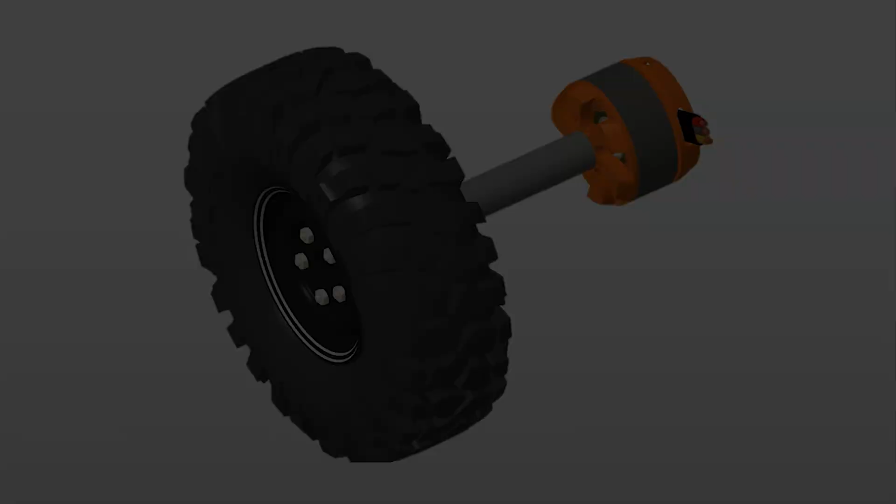Portal axles on their own don't automatically reduce torque twists. It's the gear reduction inside that often comes along with portals that reduces the twist, not the axle itself. Let's do a quick review and then I'll follow up with a demonstration. Let's start as simply as possible and build from there.

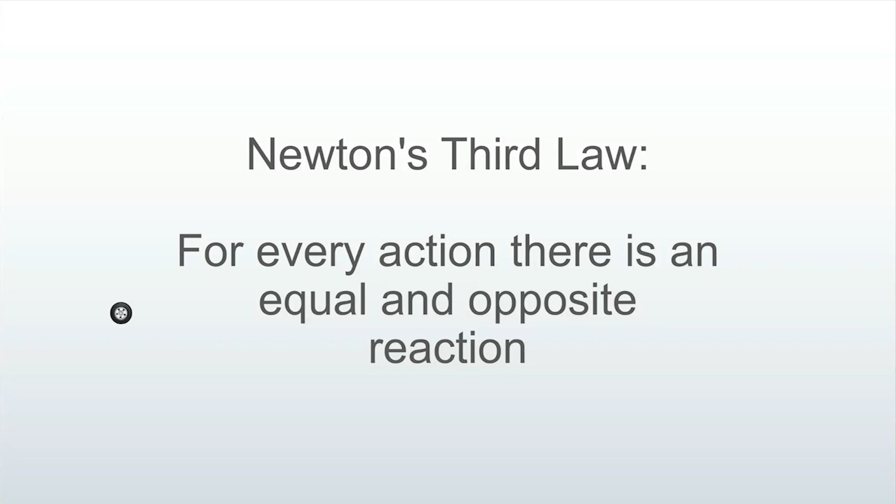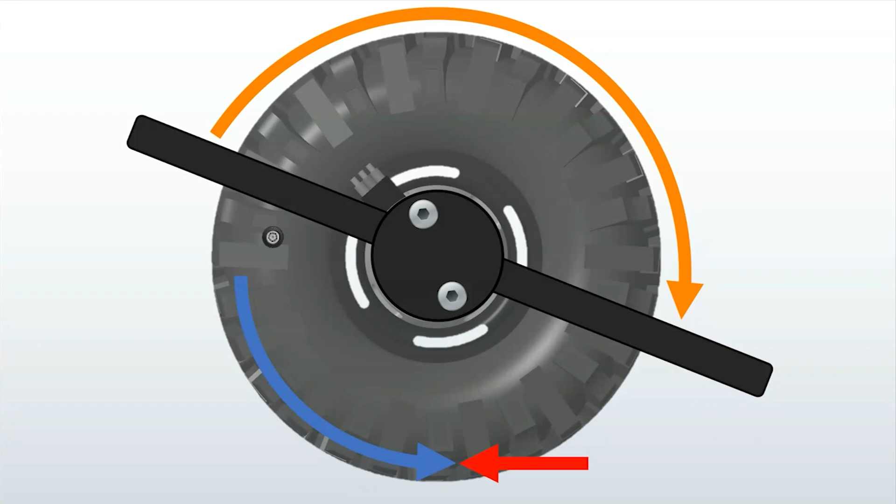Picture your motor directly attached to the tire. Remember Newton's third law. For every action, there is an equal and opposite reaction. When the wheels meet resistance to rotation, the motor wants to rotate in the opposite direction. Since your motor is attached to the skid and chassis, the motor housing twists the chassis, which is called torque twist. Let's keep it simple and switch to a top view.

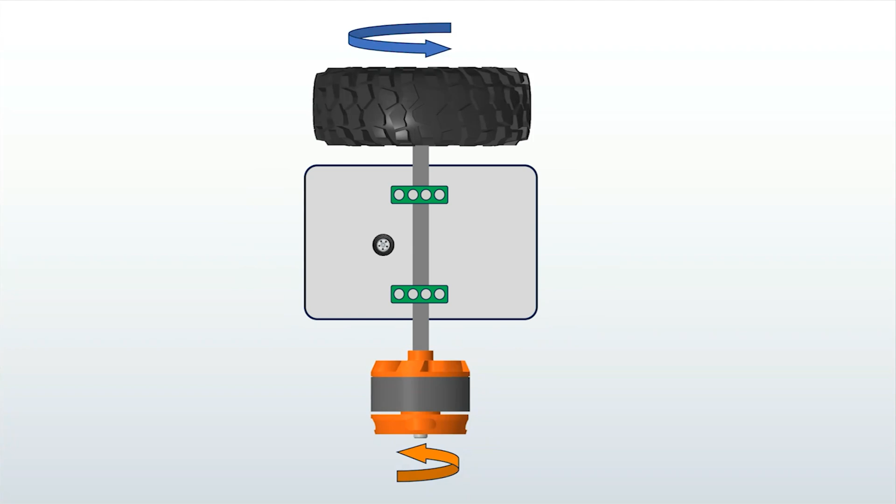Imagine adding a floating box or housing around this drive shaft. Nothing is attached to the box, it's just floating in space. The axle is spinning through the box on bearings. In one side, out the other. There's still a rigid shaft connection between the motor and the tire, and this box is simply floating on bearings.

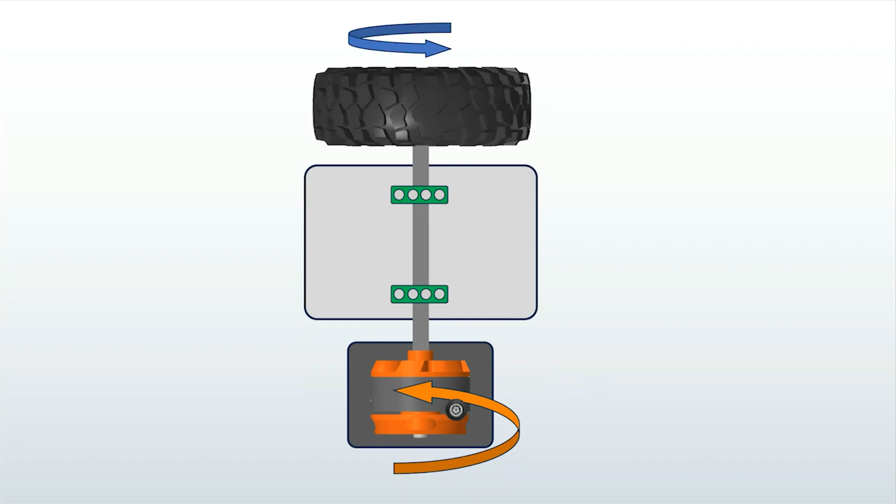Is there any force or twist acting on the gray box? No, just a very small amount of bearing friction. The plate the motor is attached to wants to resist the force of the wheel, but not the gray box. It's just along for the ride.

Now let's add some gear reduction to this floating box. There is still no force trying to influence or rotate the box. The skid wants to react to the tire contact patch. That's it. Nothing has changed. Does this start to look familiar? It's basically a straight axle setup without the bevel gear.

Now let's add some more gear reduction. There's still no force trying to influence the box. This is a portal axle without the bevel gears.

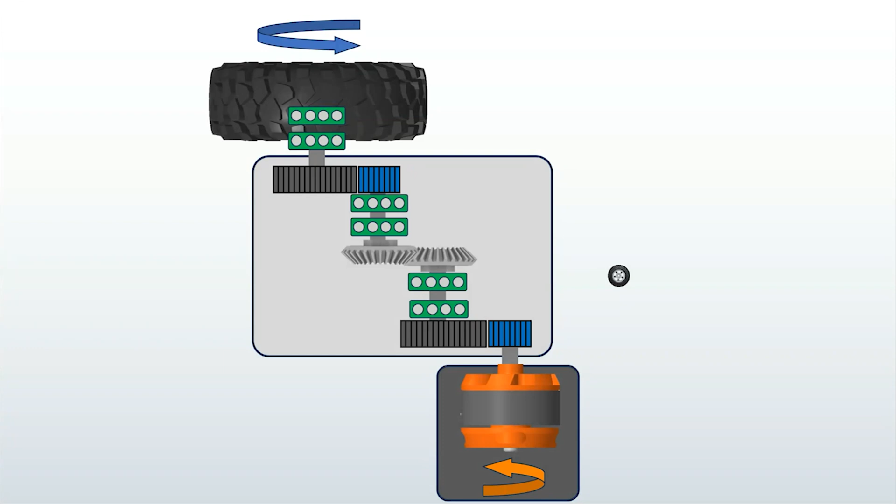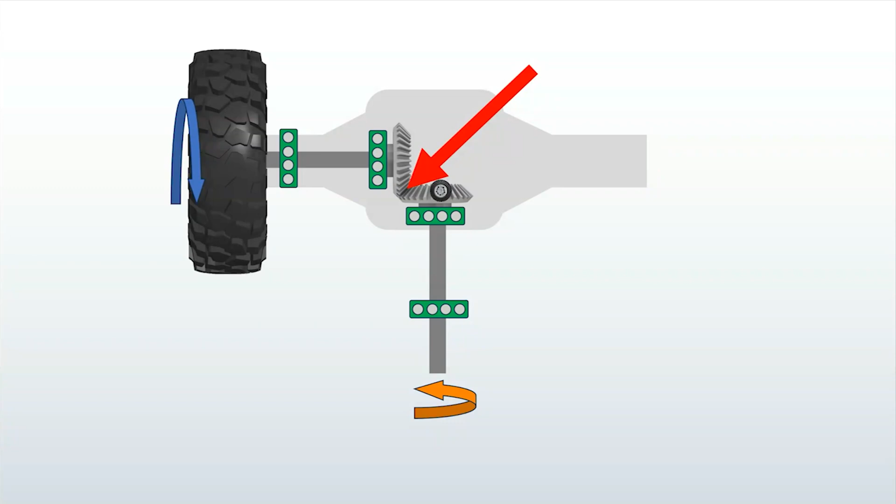Everybody good so far? Now let's replace the floating box with an axle housing and change two of the gears to bevel gears. You still have no reaction at the axle, it's just floating. The torque comes in one end and out the other. The input drive shaft is acting against the other bevel gear, not the housing.

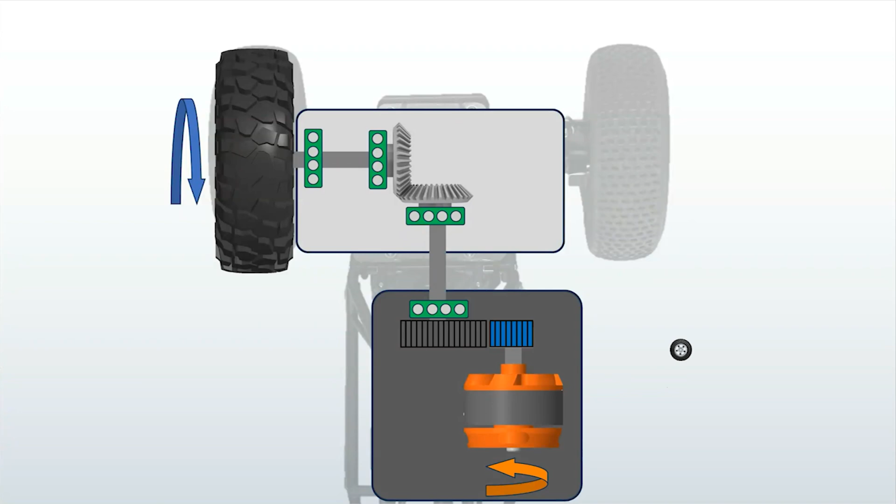Here is what a more complete straight axle vehicle would look like, with a transmission added by the motor. Remember this box from before? Your chassis and skid is the dark gray box. Nothing has changed from the prior examples. The motor force is reacted at the tire. There's no force or twist acting on the axle housing.

Now let's add some portal gears. Here it is again with the boxes. There's still no twist on the axle box. The drive torque just passes through. It doesn't matter where your gear reduction is, only the total gear reduction from motor to tire matters.

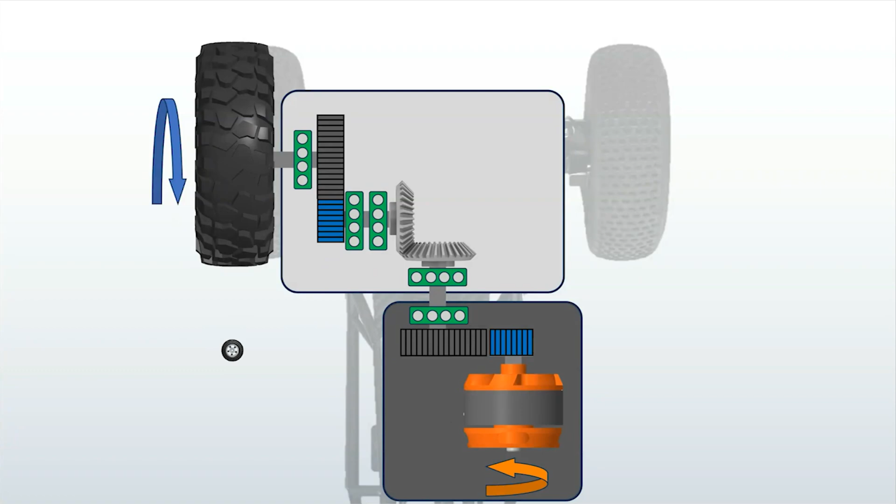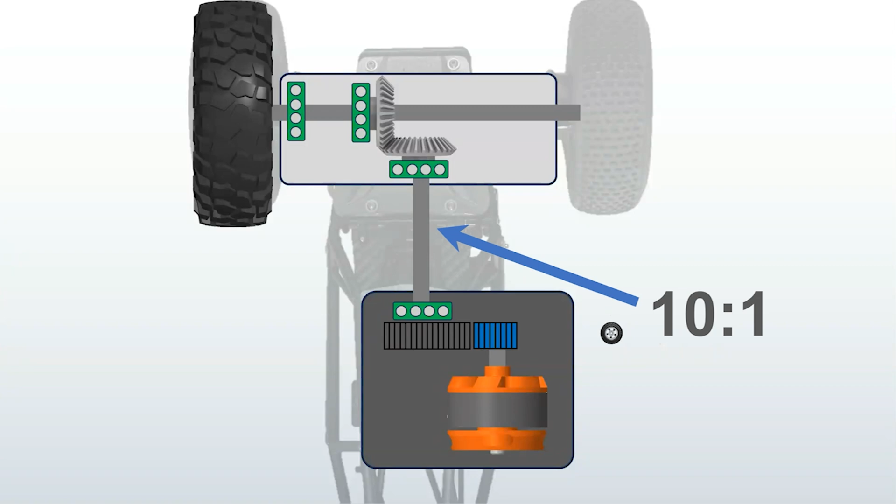Now let's address a common misunderstanding. Let's say you have a 10-to-1 output from your transmission. Your drive shaft is seeing a 10-to-1 torque between the transmission output and the axle. Now let's move some of the gearing from the transmission to the axle. This is what happens when you add a portal axle. The total gear reduction is still 10-to-1 because you multiply the two ratios.

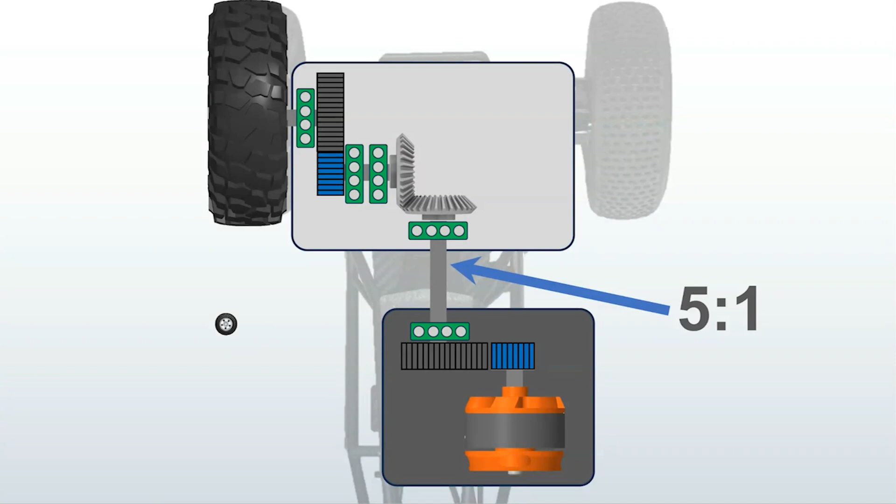The misunderstanding is that since you've moved some of the gear reduction from the transmission to the axle, there is less torque on the drive shaft, which reduces twist. The drive shaft is now seeing 5-to-1, which is good. It reduces strain on your drive shafts and transmission, but it doesn't change twist. It doesn't matter if the drive shaft torque is 5-to-1 or 10-to-1. The twist reaction doesn't happen until you get to the tire.

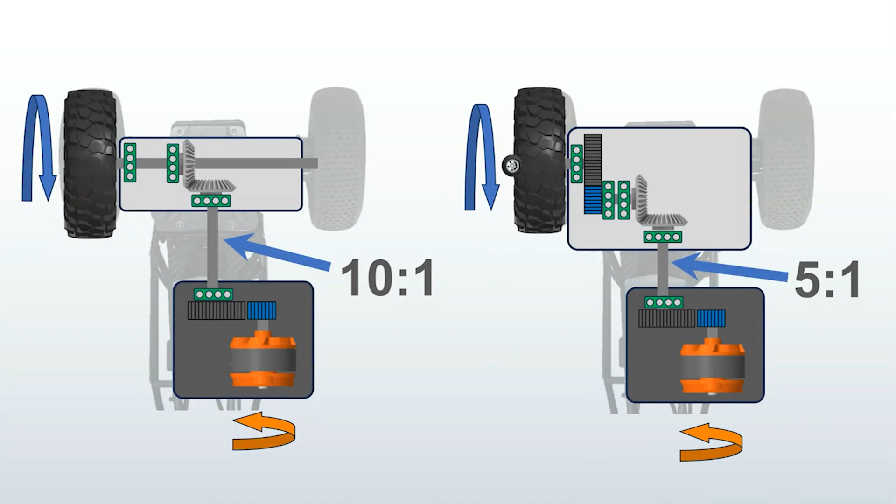You can't just pick one small portion of the drivetrain and isolate it. You have to look at the complete system. The action is the motor, the reaction is the tire. It doesn't matter where the gear reduction occurs in between those 2 points. Of course, there is torque in this drive shaft, and there is visible twist between the skid and the axle, but that twisting reaction is not coming from forces between the axle and the skid. The drive shaft simply cannot impart any forces on the axle.

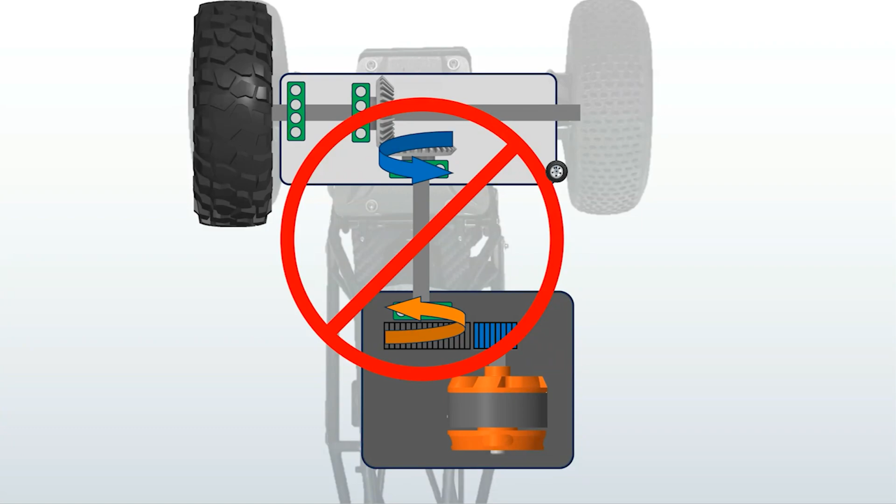All you can do is spin the bearings inside the axle. One of the misconceptions people have is that moving some of the gear reduction away from the transmission and putting it on the axle reduces twist. This is not correct logic, and the math does not support this.

Let's see a demonstration. I've got the rear axle completely detached. There's no shocks or links or anything holding it. It's just floating in space. I'm going to hold it with my hand. And then what I'm going to demonstrate is whether or not this drive shaft puts any twist onto the axle. A lot of people believe that's the case, and I said that because your differential runs on bearings, the force coming from the drive shaft simply passes right through without any effect on the axle. And we're going to see if that's accurate or not right now.

So let me test the throttle. Okay. So, yeah, there's no twist whatsoever being transmitted to my axle. It's passing right through. Yeah, I don't even feel bearing friction.

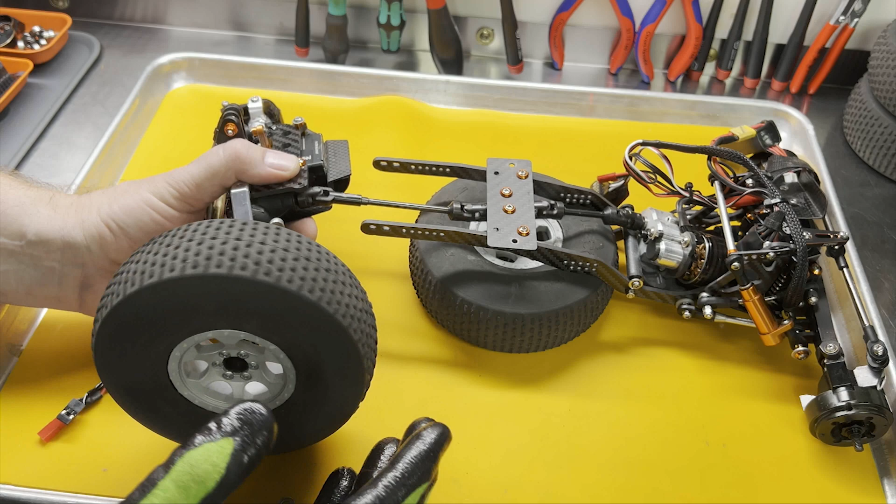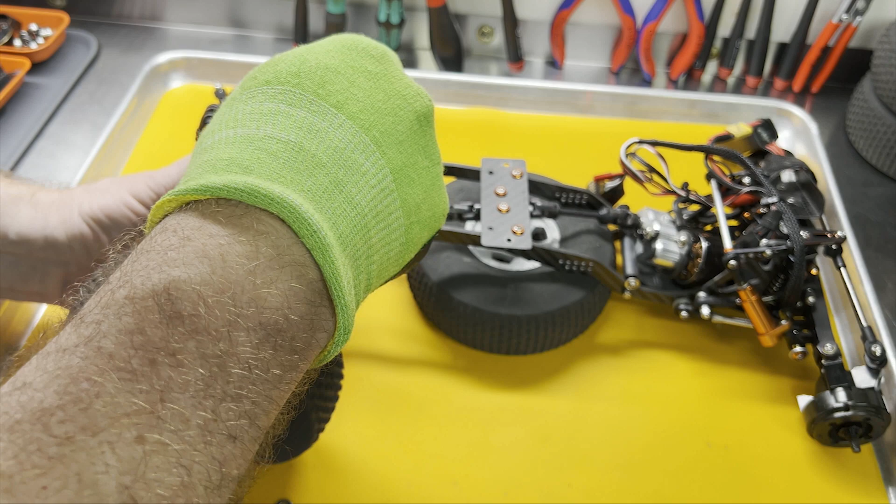All right, now we're going to test it where I can put a little bit of resistance on the tire. So let's get it going. Run it at medium speed. All right, as I add resistance to the tire, it wants to twist the skid, and it also wants to lift up the front of the rear axle. So the rear axle is rotating this way, counter to the braking force on the wheel, but I'm not feeling any rotation in the axle at all.

Got it. Did you see that skid lift? That's from the drive shaft being resisted at the wheel. Go ahead and try it one more time, real slow. Stop. All right, one more time. Now, I'm not feeling any twist at the axle. I'm only feeling the rotational resistance of the axle, which makes sense.

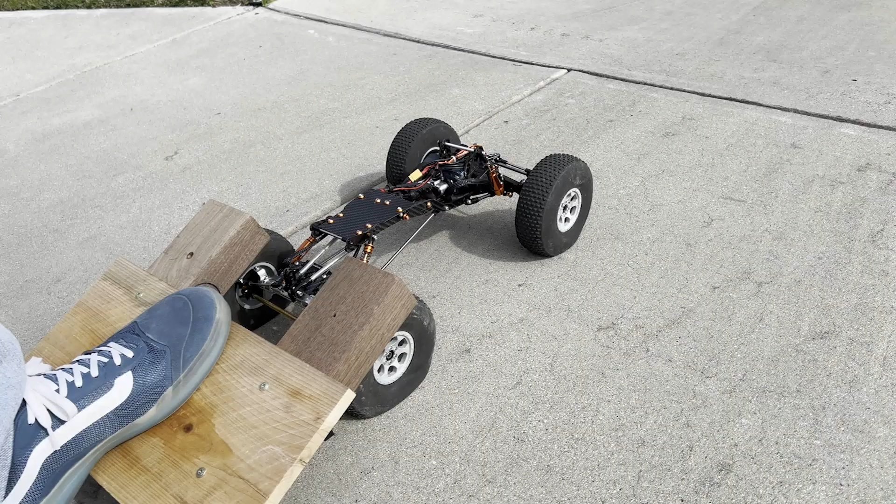My primary rig has portals and a 95-to-1 rear gear reduction. And as you can see, I still have twist. On a shaft-driven vehicle, it's always going to be there. Gear reduction, shock tuning, and sway bars are the only way to address it. And just so you know, you cannot fix it with linkage geometry, but that's a topic for another day.

So what did we learn? Portal axles on their own do not reduce torque twist. It's the gear reduction that actually reduces the twist. And most common 10th scale portal crawler axles have about a 2-to-1 reduction built in. A portal axle with no gear reduction would not change your torque twist at all. Similarly, you can add reduction anywhere else within your drivetrain and get the same result as a portal axle. For example, a motor pinion with half the teeth. I hope that helps. Remember, it's just a toy.